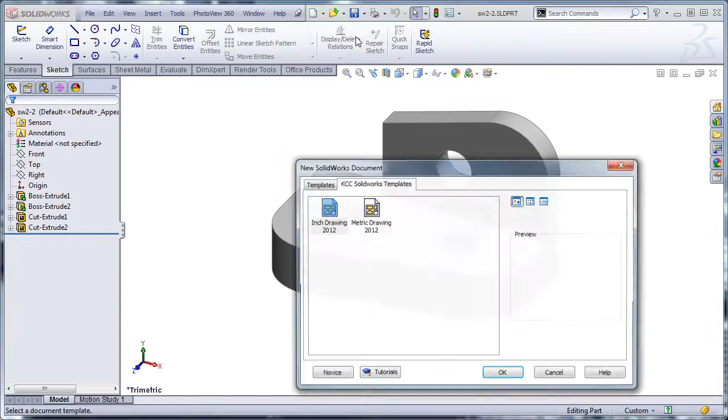So we're going to make a drawing from a part or assembly, and it's going to ask us which template we wish to use. This is an inch part, so we're going to select inch drawing. And I'm going to choose my sheet size, so we have the options of A through E. And we'll click OK. There's nothing else we need to do here.

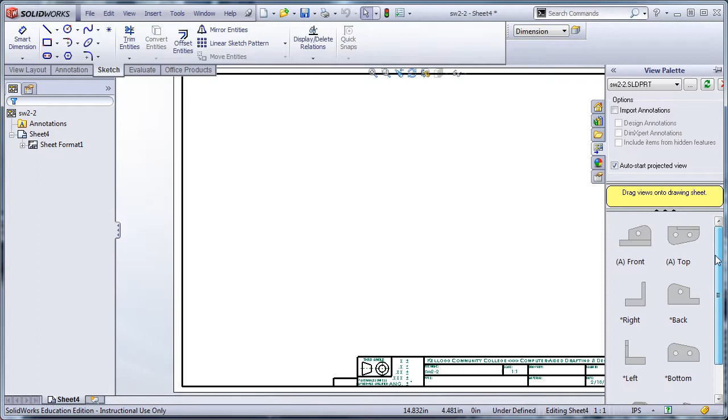It's going to open up a B-size border for me. And then you'll see in the right-hand column, it shows me all my views. What we do here, it's not obvious from looking at this unless you read this box, is you drag the view onto the sheet.

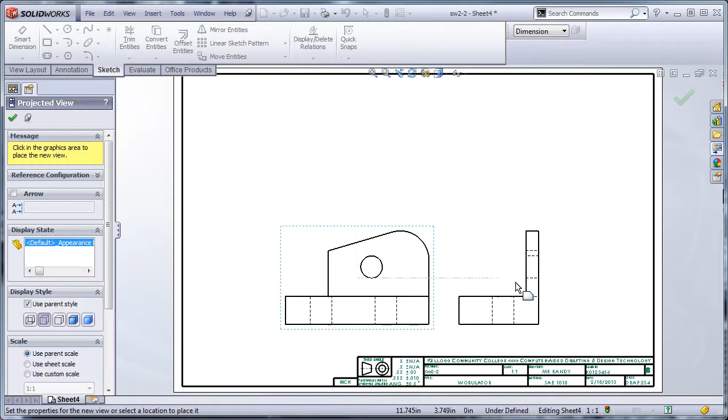Now I'm going to drag the front view onto the sheet, and I'm going to let it go. At that point, notice that the box has disappeared, and notice that as I move away from that view, it just automatically rotates a view for me off the front view.

We don't want to individually insert views because they won't be aligned. So I'm going to pop a top view right here. I'll just click, and then I'll come down, touch the front view, and I'll move to the right, and I'll put in my right side view. We could also do an isometric view here if that's the view we wanted, and that's okay for this part, so we'll just drop that in.

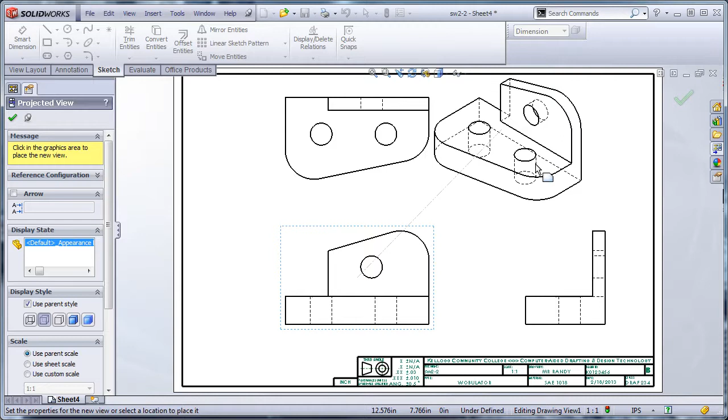Now I can close this dialog box. Now the isometric view, something to note right off the bat, we never show hidden lines in isometric views, so make sure you come over here, and I've just clicked in this viewport. You can see when I mouse into the view, it lights up a little gold box there. Click inside the viewport, and then we're going to turn hidden lines off. You can also do that up here. So you can change the appearance of the view in either place.

Doesn't make any difference. We're going to look at these three views and make some decisions about hidden lines. I don't know that it's necessary to show hidden lines in this view, so I might be inclined to just turn them off. Your assignment does not look that way when you look at the handout, but you could turn off hidden lines in this view if you wish.

Now, this part has a rather odd scale. You'll notice that the drawing scale down here automatically is filled in and says 1:1. But we need to change the drawing scale for this one. This can be a little big when we bring our dimensions in.

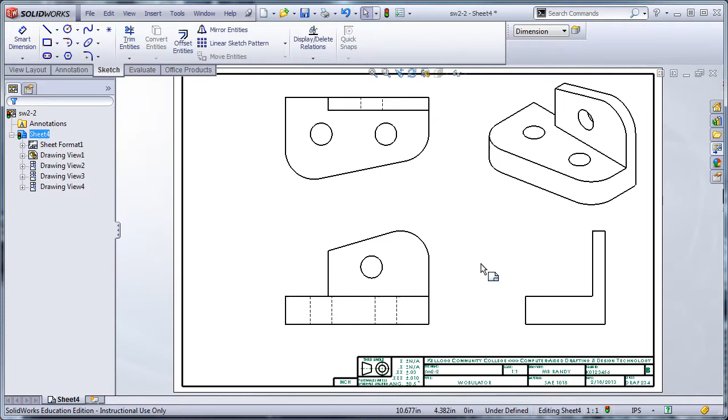So again, this is a viewport, and this is a viewport, and there's a viewport. I'm going to click out in white space, so I want to make sure I'm not lighting up a viewport. I'm going to right click, and we're going to go to Properties. This is where we change our global sheet scale for our part. I'm going to change this to 3/4 size, or 0.75 equals 1. I'll hit OK. And it's going to shrink my views down.

You need to be very careful. When you bring in your first view, let me scroll down. A lot of students, when they want to change scale, go in here and edit it. You are not allowed to do that for me. The title block automatically fills out based upon the sheet scale. So if this box is not checked for the first view that you insert, then the title block will not correspond to the view scale.

So I want you to notice, first of all, that my first view in, remember I brought my front view in first, has a scale of use sheet scale. That means that no matter what my sheet scale, the title block will be correct and the drawing view will be the correct size. If I look at these other viewports, it's going to say use parent scale. This is the parent view because it's the first view I brought in. This is a child, this is also a child, and we would see over here the child also says use parent scale.

So parent view and child views should be linked by 'use parent scale.' That way, if I change the sheet scale, all these views will change their size. The isometric views we put in can be anything, so I'd like to shrink that down a bit. Only the isometric view can use a custom scale.

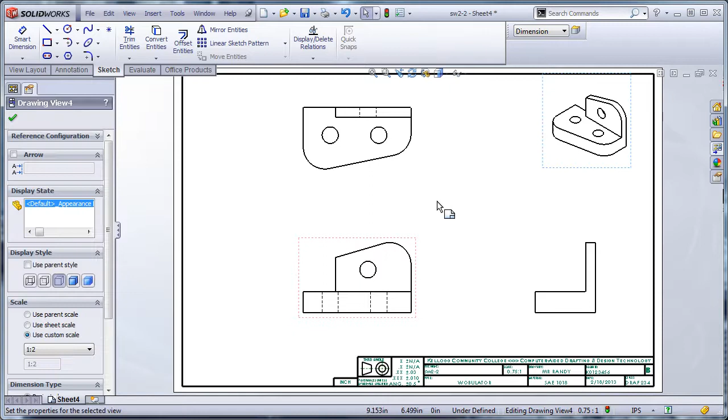Now we have our three views, and we're ready to bring in dimensions, center marks, and things. Let's see how we detail this part. If you remember when we did this assignment, I'll bring this on screen for a second.

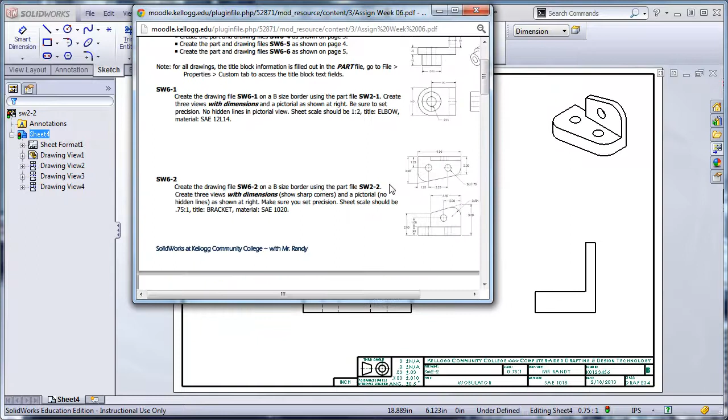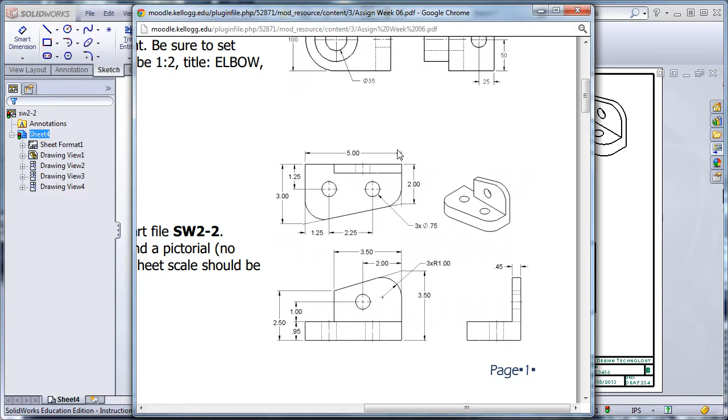We'll have to scroll over. There we go, let's stretch this out. When we did this first assignment, this part was a bit unique in that we filleted these corners in the sketch, but the dimensions went to the sharp corners. You can see that this drawing has sharp corners shown here. I think you can notice when I look at the drawing that we don't see those sharp corners, so I'm going to do this first just so it's easier to see.

I want to put the sharp corners in for these three radiused corners here, and I'll show you how to do that. This is a rather weird thing—it doesn't seem very intuitive, but this is what I'm going to do.

I'm going to click on this line, hold the control key down, and click on this other line, just like we do when we create a relationship. Then, the weird part: I'll go up here and click on the point tool. Watch what happens—it inserts a sharp corner for me. The point is placed at the intersection, but instead of displaying the point, when you're in a 2D drawing, it will put in whatever you've identified in the SolidWorks settings as the theoretical sharp appearance.

So let's do that again. I'll pick this line, pick this line, and click the point tool. Then finally, we'll pick these two lines and click the point tool. All right, so we've got those in.

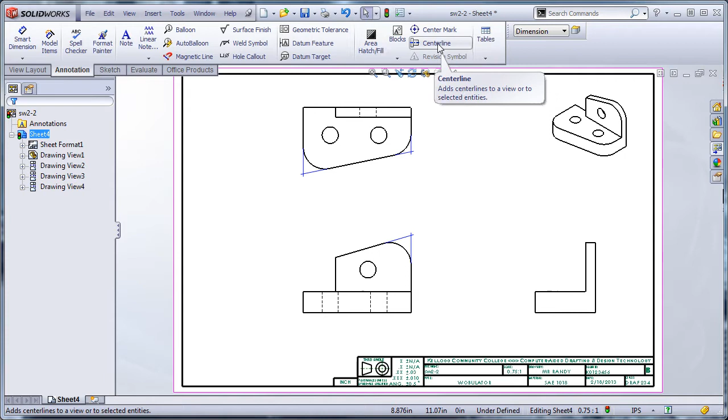Let's go ahead and put our center marks in. Again, it's not necessary that you do this first—it's just easier right now because the drawing is very clean so we can see the center marks. We have a center mark tool and a center line tool up here. These behave a little oddly, in that once you start them, you have to close them before moving on to something else. So let's click on the center mark tool.

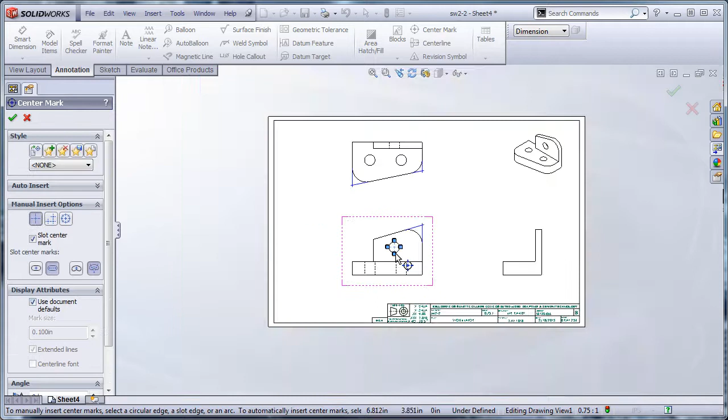Now, this is a hole, all by itself. Here's the center mark dialog box, and we're just going to do a single center mark. It has default settings, and I'll click on that hole—let's zoom up a bit. I'll click outside here and hit escape. Now that's an appropriate looking center mark.

We'd like to see that this extended line bridges the hole—doesn't have to be exactly 50-50, but we have a bridge on either side, and it will show in the print when we print it out. So that's a perfectly good looking center mark there.

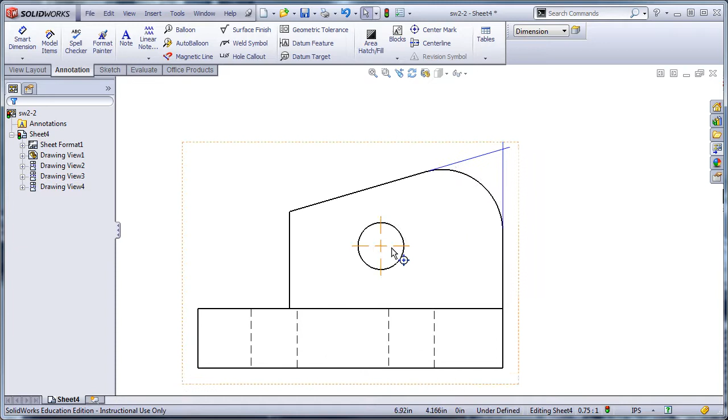Let's zoom out, go up here, and do the center mark tool again. Now, technically this is a hole pattern, because these two holes are dimensioned from a single dimension off this back edge, so we'd like the center marks to be connected. So what we're going to do is click on the pattern or linear center mark button here—I call this pattern because it's for hole patterns.

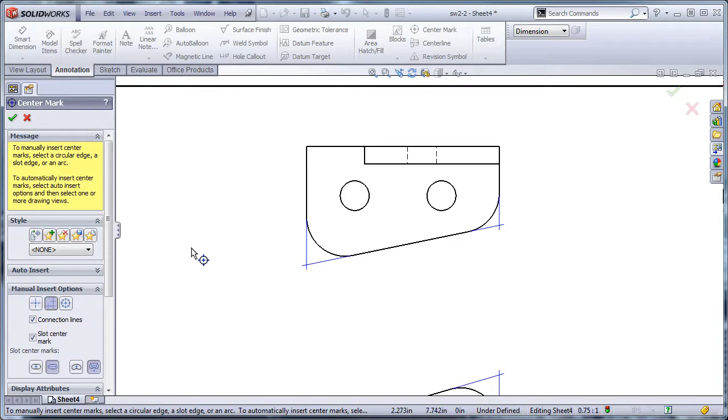Now I'm going to pick the first center mark, then pick the second circle, and it connects them for us, and we'll hit OK. So we get a nice center line connection between the two.

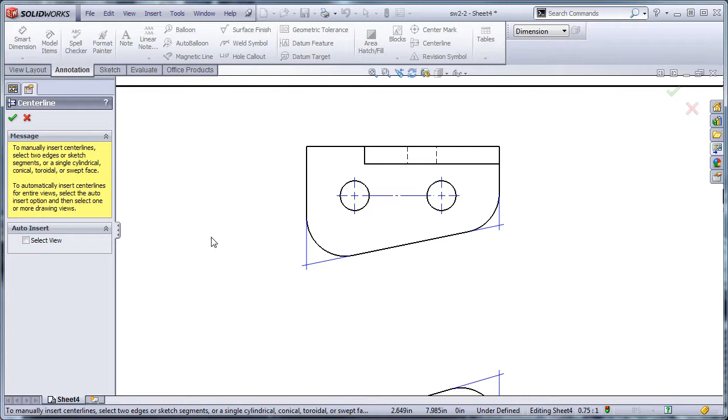Now I have some center lines to put in my views where I see the hidden hole. So let's use the center line tool. There are a couple of options for it. If you don't check this box, which we'll do in a minute, you pick the two sides of the cylinder, the hole, and it puts a center line in.

Now for this view, we'll do it a little differently. Let's say select view, and I'll just click inside the viewport. All I have to do is get inside that golden box and click, and it'll center mark. Now, this is a perfect example.

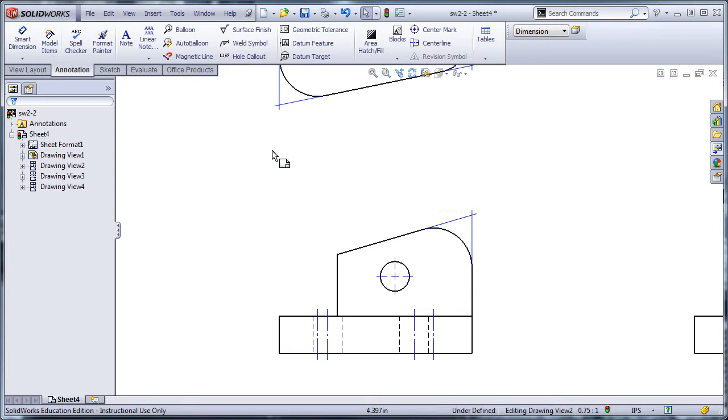I got some extras here. It gave me a center mark for this corner, and it gave me a center mark for this corner. So I'm going to have to do some cleanup. If you're going to use the view option for the center mark tool or center line tool, be careful.

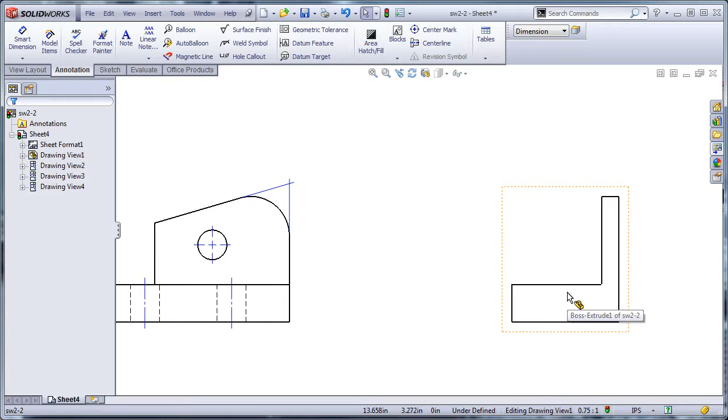You may get some freebies that you don't want to see. So these have to come out for sure. Those are filleted corners. We don't show those center lines in this view. We only would show the two hidden holes. And again, with the hidden lines off in this view, we don't need to show center marks. If you're going to turn hidden lines on, then you've got to put the center marks in this view.

Up to you. All right, so I have now all the detail information here that I need. I'm ready for dimensions. Now, I'd like to show you something here, and this is another situation where I'm showing you what not to do.

I'm going to bring a dimension in. I'm going to go between those endpoints. You'll notice that by default it comes in with parentheses. I'm going to turn those parentheses off. And that looks perfectly fine.

However, let's take a look at this. If I double click this dimension, nothing happens. I can double click that all day long. Nothing happens. It just brings up the dialog box where I can edit that dimension. I can change the precision and do different things. So that dimension is dead. It's not connected to the model at all.

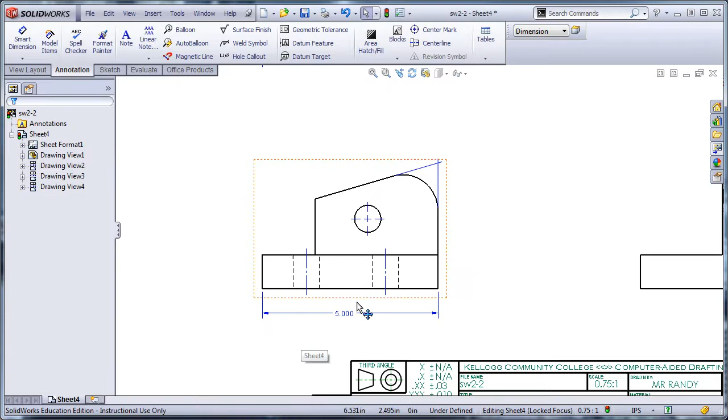So I'm going to delete that dimension. I want to show you how I want you to do your dimensioning in SolidWorks. What we're going to do is come up here and click on Insert Model Items. You can also get it on the Annotation tab, which is where center mark and center line are. Insert Model Items is right here. If you can see my mouse there in the upper left corner, that's the Model Items button.

Now, we try to leave things in their default appearance at KCC so that you know what it's going to look like if you go to work and do this. So when you look at this feature manager over here, it defaults to selected feature out of the box when you install SolidWorks, but we want to bring in all the dimensions for the entire model.

So these two steps I'm going to do right now, you're going to have to do every time you start working in SolidWorks on a given day. Once you've set it, the rest of that class period, it will remember the settings, but when you come in the next day and do this, you'll have to reset this.

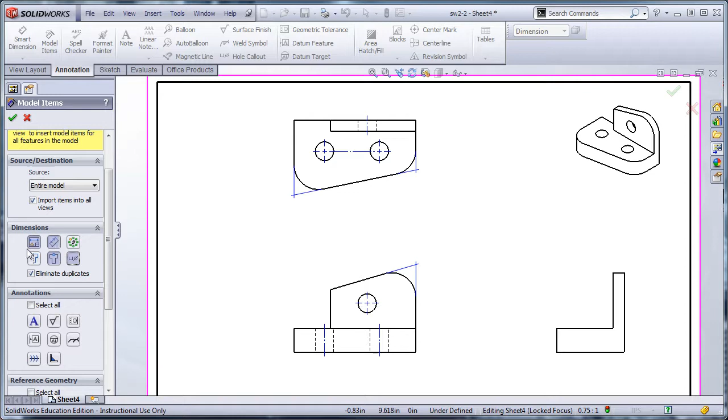So entire model, and then what we want to do is make sure that these four buttons are depressed. You can see they're gray now. We need to bring in dimensions if they're marked for drawing. We need to bring in all the dimensions that are not marked for drawing, which we don't use these two features, so just make sure they're both highlighted.

We need to bring in any hole wizard hole locations, and we need to bring in hole callouts. So all these things need to be brought in. We don't need to bring in counts for patterns. We won't use those in that way. And we don't need to bring in the hole wizard profile, which is the profile view dimensions for the geometry that SolidWorks used to create the hole wizard hole.

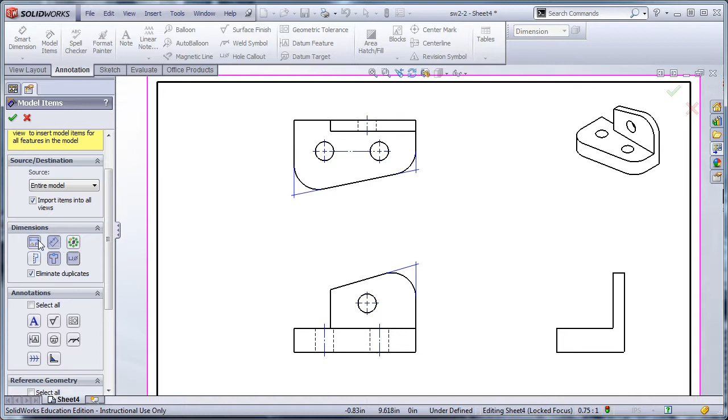So these four buttons have to be clicked on. Make sure they're grayed out, and we want entire model. We're going to click OK. Now SolidWorks just spit in, if you will, all of the dimensions for this part that were in the model if there was a view, a proper view for them to come in.

If I didn't have this top view in place, I would not have gotten most of these dimensions. There are a few of these that might have popped into the right side view, but most of these dimensions wouldn't have come in. So you must have views in the model for each dimension to show properly in, or SolidWorks won't import them. Now you remember a minute ago I had a 5 inch dimension down here at the bottom.

If I double clicked on it, nothing happened. Well, here's that dimension again, up at the top now. I'd like to show you part of the power of SolidWorks. In SolidWorks, the drawing and the model are both linked dynamically. If I make a change in the drawing, it changes the model file, and I'd like to show you that.

So let's double click on this dimension, and let's change the width of this part to 6 inches. Now you'll notice that my views have all got these grids over them. That means something has changed and the drawing hasn't updated yet, so we have to rebuild. I'm going to go to the rebuild button and click on that, and I want you to watch that top view. It just changed and is now 6 inches long.

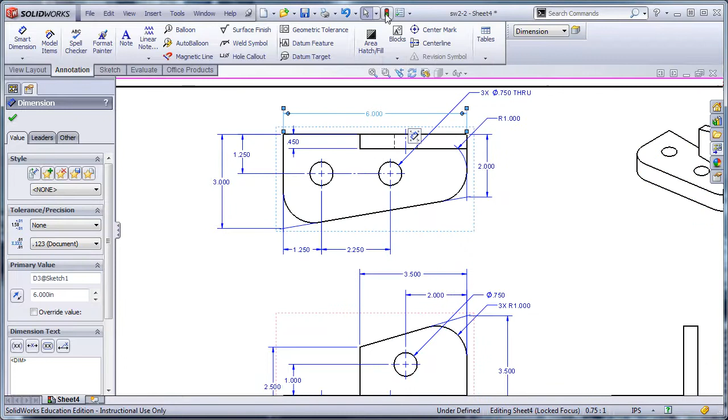Better yet, let's save this part. We'll just call this temp. And let's open up the model. I'm going to right-click in the view, and we can open the part up. It's a fast way to go between the part and the drawing. You can see that the part has changed on the screen here.

So let's go to that boss extrude, and let's edit that sketch, and let's change that back to 5. Let's close the sketch. You can see the model is back to its original shape. We're going to save that and close it, and the drawing has automatically updated.

So if you import all your dimensions, they're live dimensions, and you can change the model. If you found an error, you can change the model by double-clicking on a dimension. That's an important advantage we want to take advantage of in SolidWorks.

So I do not want you to manually put any dimensions in if you can help it. There will always be the occasional situation where you can't get SolidWorks to import the dimension, or put the dimension in the view it should be in, that you're going to have to manually dimension something. But that may happen once in a drawing, and it won't happen in some of these drawings early on.

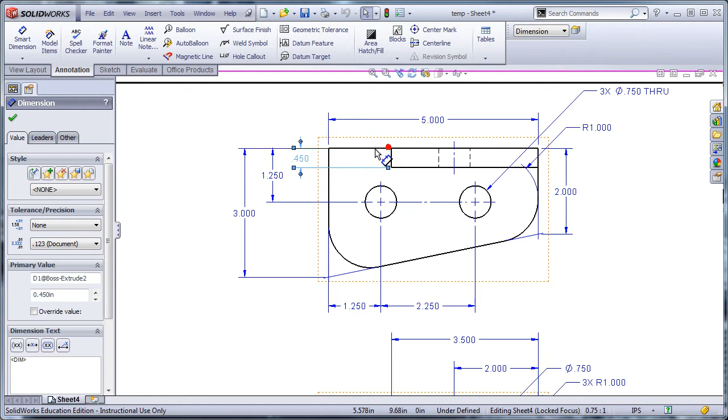All right, so let's beautify this drawing. There's a few things we need to look at in this view. First of all, one of the problems with SolidWorks, you'll notice we got a nice gap in this corner, and we got a gap here, but depending on how you create the features, the extension lines will oftentimes run all the way into the feature and cover up or not show that gap. So I'm going to have to pull that back, and I'm going to eyeball that gap, and you're going to have to develop that eye of approximating the gap based on the ones SolidWorks gave you.

Okay, we want to see consistent gaps, and you're all visual people, or you would not be hanging out in the CAD lab. So I'm going to expect to see appropriate gaps there. If you get too tight and when you print it there's no gap showing or it's minuscule, I'm going to mark that wrong. So you've got to make sure you get the right gap, and again, don't go too big - that's just as bad. All right, so that gap's good now.

This dimension, I don't want to see this look, so we'll talk about that in class, but I'm going to cover up that gap on that center mark. That's not an appropriate center line look. So I'm covering these gaps - I'm just clicking on the dimension and then dragging that point up. My gap for the theoretical sharp is okay, I'm not crazy about how that's going to print, but that's okay. And I can pull this back - I'm going to pull this back quite a ways.

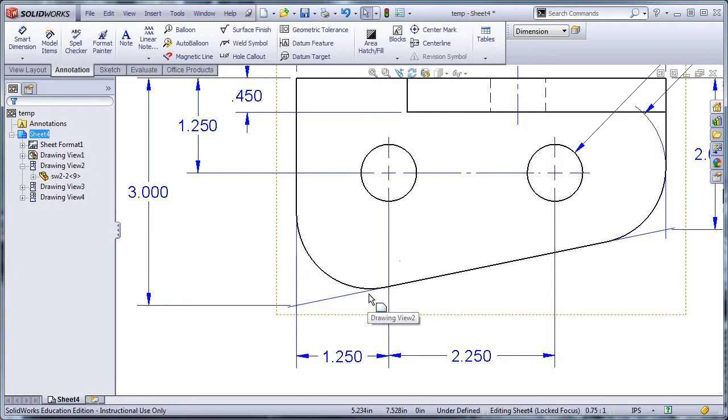However, the theoretical sharp that's in here, I can't do anything with those gaps. I don't like this look at all, I don't like how it prints. I'd like a nice big gap between this line and the arc, but I can't do that with the theoretical sharps that SolidWorks inserts, so we're just going to live with it. All my gaps look okay over here.

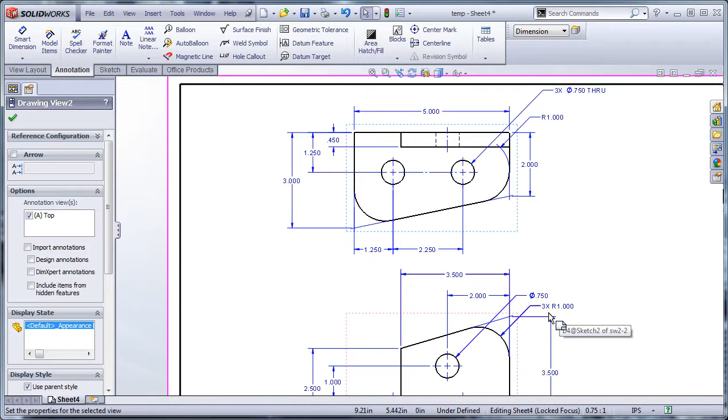Now I have to make a decision on where I'm going to call out the radius and the hole diameters. Let me zoom back just a little bit here. You'll notice that SolidWorks gave me a 3x by R1 dimension over here, which is kind of nice, so I'm going to keep that one. This other one's redundant, so I'm going to right-click on it and hide it.

The advantage of hiding dimensions is that if you decide you need them later, you can bring them back. I'll show you that really quick. You go to View, come all the way down to Hide/Show Annotations, and all your hidden dimensions turn gray. If you click on them, they turn blue again.

You can also turn off dimensions, so if I didn't want that dimension, I can turn it off. Whatever you click on flips it - if it's hidden, it becomes visible, and if it's visible, it becomes hidden. When you're all done, you have to turn that back off - View, and then Hide Show Annotation.

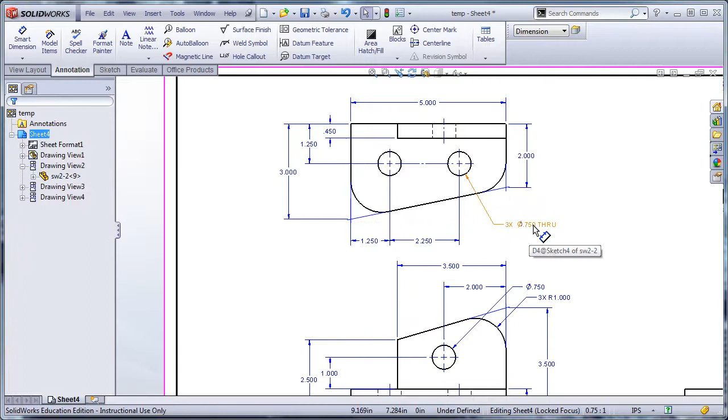All right, so this view is actually looking pretty decent. I'm going to move this whole call out down here. Notice that it sorted out there were 3 of those .750 diameter holes, and it put that right in the note. Let's have a look at our front view here.

We have a gap here. We do not have a gap here. I'm going to click on that 1-inch dimension, and I'm going to bring that over.

While it put the .950 dimension here on this edge of the part, I really don't know what this line is. It's really not showing me the profile, but it's showing me the profile very nicely over here.

So I'm going to take this dimension and drag it across, and I want you to notice something - when I get close to the 1-inch dimension, it's going to snap, and you might see a yellow line. It's hard to see, but there's a yellow line striking across those dimensions, snapping them together. Now, by doing that, I've messed up the extension line, so I got to pull this one back, and then pull this one back.

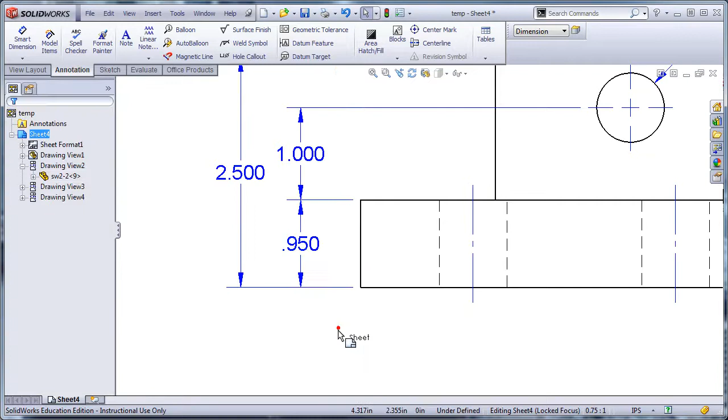And that one's too tight - I think you can see that. I'm going to click on that and pull that back even further to get the right gap there. We said we were going to keep this dimension, however, we don't like this look.

I'm going to hide this one because I've already got the hole call out up here. So I'm going to right click and hide that, get it out of the way.

Now the 3XR1, that's fine, but that's a big radius. We could show the center point and flip that arrow in, which is kind of preferred when we have a big radius like that, so I'm going to flip the arrowhead in. In SolidWorks it's really easy - you just click on this dot right here, and it flips the arrowhead. That works for any dimension, so I can click on this dimension and flip the arrowheads in or out.

And then I need a plus mark here, not the whole big center mark, just a plus mark, so let's look at doing that. I'm going to click on the center mark tool, and I'm just going to go ahead and click this, and we can see that's definitely not what we want. So over here in Feature Manager, I'm going to turn off this checkbox that says Use Document Defaults, and I'm going to say don't extend the lines by turning that off. And that's the look we want.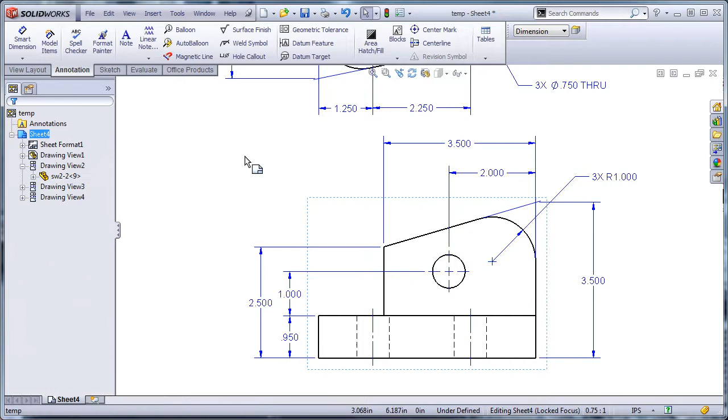I need to cover these gaps on the circle here - cover these gaps. This is one of the most common mistakes that I deduct points for in drawings: the gaps on the extension lines or the extra gaps we get around a center mark.

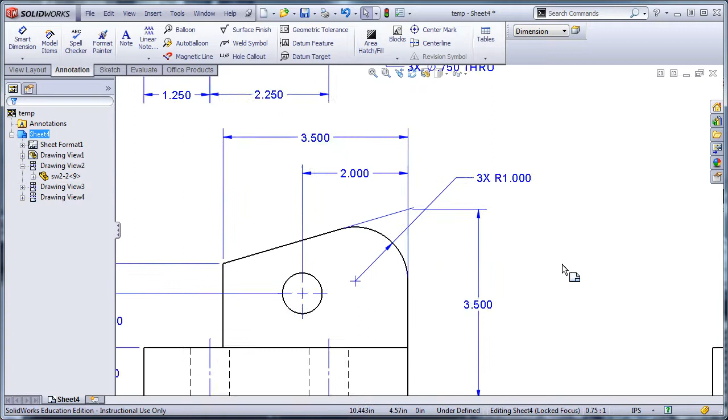All right, let's zoom out a little bit. Now we have this lonely looking right side view over here, and the reason for that is there's a dimension in the top view that really belongs in the right side view. Again, this is not the profile shape of this section here, so this dimension's in the wrong place.

So I'd like to show you how to move a dimension. To move a dimension, you hold the Shift key down on the keyboard, then you click on that dimension and you drop it.

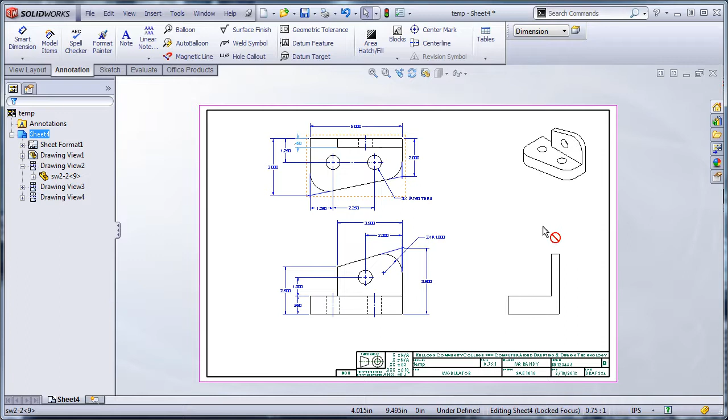Notice the dimension would like to be up here somewhere, but I still have the no symbol there, the circle with the slash. It's not until I get on top of the view that it will let me drop it there. That's a shift and drag. Control drag copies the dimension, which is usually not what we want, but if you ever have to do that, that's how you do it.

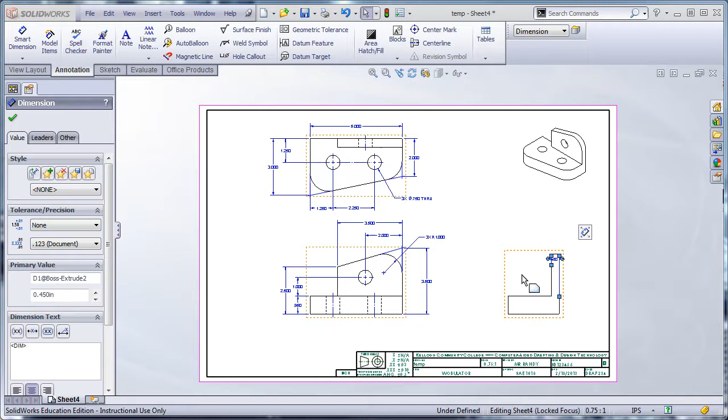Now I'm going to zoom up on that 450 dimension, and we'll place it, and you'll notice that my dimension kind of snapped in, and we'll come back to that in just a minute. I'm going to pull this up and get a gap here, and drag that one up and try to get about the same gap.

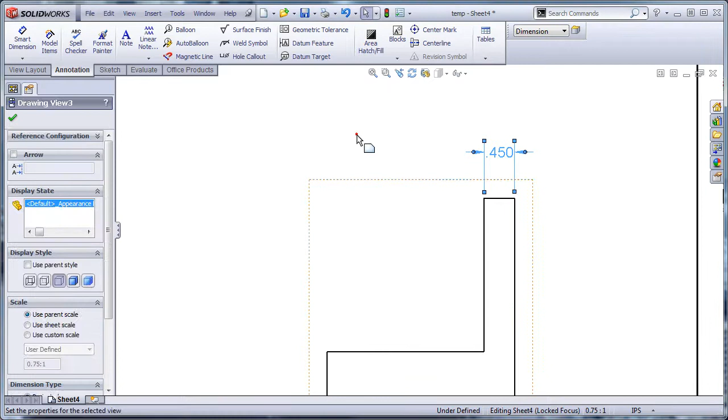That looks better. So to check dimension spacing, because I know I have some spacing problems over here, if you wish, you can turn on a grid. Click on the eyeglasses here, and here's the grid button, and I'll turn the grid on. The grids are already set up, both for the inch and metric template, to give you the appropriate spacing for dimensioning and view placement. In an inch drawing, these are 1/2 inch. In a metric drawing, they're 12 millimeters, and it will give you appropriate spacing.

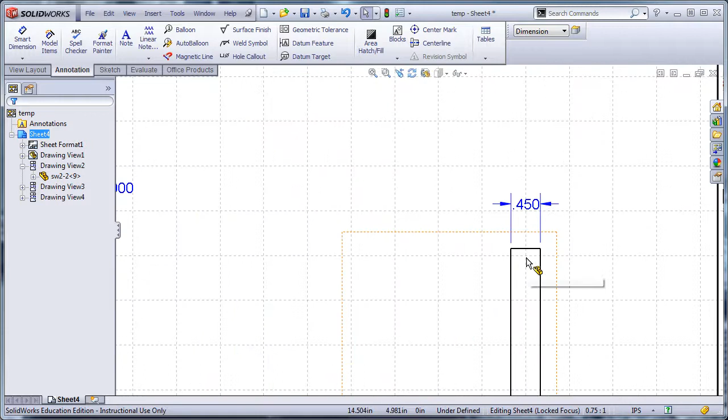So let's zoom up on that dimension, I just want to make sure. Here's a grid line, and there's the object line. So look at that distance, and then here's a grid line, and here's the dimension line, and that's the same exact distance. You probably can't tell because you're not moving the mouse, but as I move up, it snaps to that spacing.

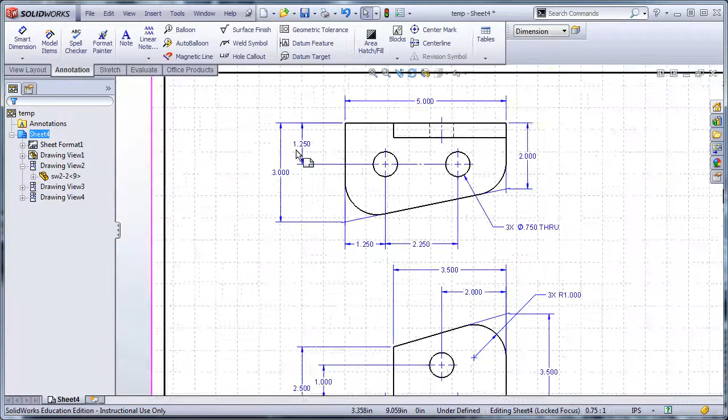All right, let's zoom back over here. So this edge is right on the grid almost, and when I drag this over, it's going to snap right there. I'll drag this one over and get it to snap. These are out a little far, and they actually snap right there. So I'm going to pull those in because those were a little far out. This one is about the appropriate distance. All the rest of these look good.

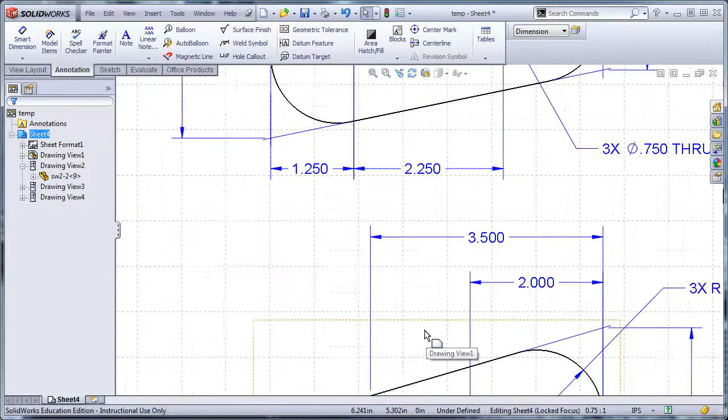This one is also a little out. It snaps right there. I'm going to bring this one down. It should snap in right about there. Make sure you stagger dimension values and those kinds of things.

If your dimension keeps locking to different things, I don't know if you can tell, but my dimension is snapping to various dimensions. If you hold the Alt key down, your dimension will wander for you while you're moving your mouse. That's the Alt key to get it to move freely.

All right, I got to get these parentheses out of the way. I'm not sure why they're there, I must have accidentally turned them on. I'll show you that again. Click on a dimension, that little button pops up, and then when you mouse over it, you can turn the parentheses off right there.

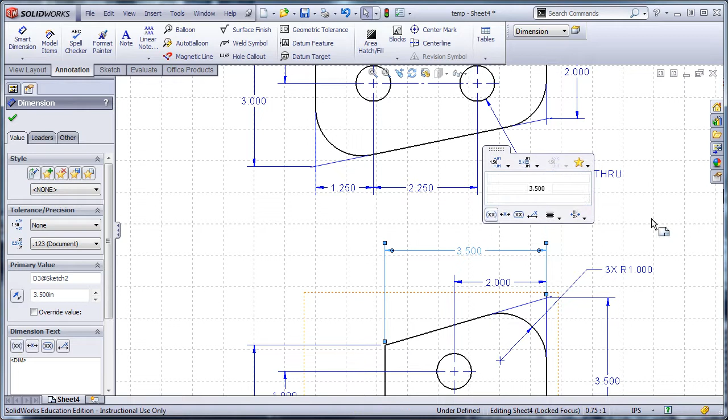All right, how are these views looking now? They look pretty good. This one is floating pretty far out again. I'm going to move that in until it snaps.

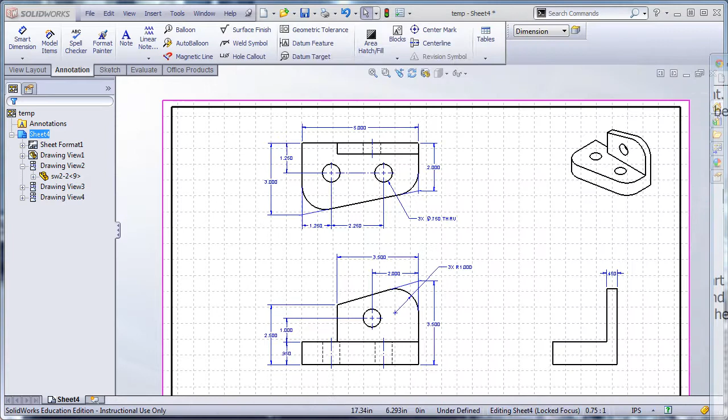Now I want to bring the original drawing in for just a sec. Notice that all of the dimensions on this drawing are 2-place decimals. Okay, all the dimensions are 2-place decimals. So you'll see on this drawing, of course, that everything is 3 places. We need to fix that.

The fastest way to fix that, if you're in the latest version of SolidWorks, is to come right down here at the bottom right corner of your drawing editor where it says IPS. That means I'm in inch, pound, second for my units right now. And don't think you can just change it directly. It doesn't work well. If you'd use the wrong template, this will make a mess of things.

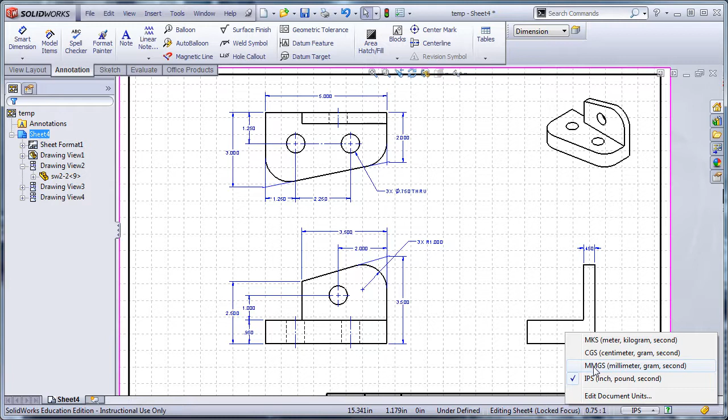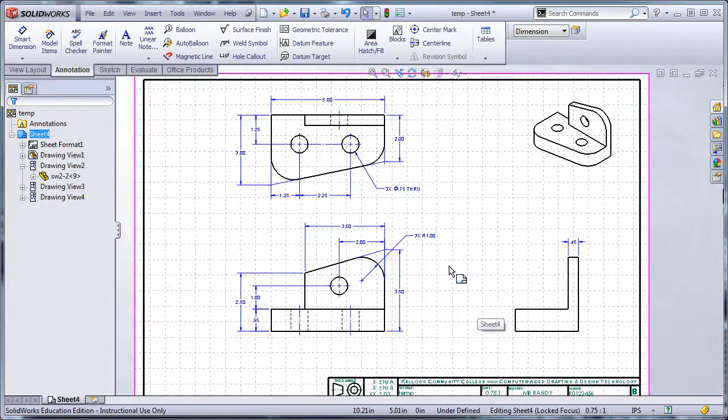But I want to edit the document units, and I want to change my length dimensions to 2 decimal places. Now this is a little misleading because this will also change hole callouts and everything else, but nonetheless, that's the term. Let's hit OK. Now I have all 2-place decimals, and I want to just look over my drawing now and make sure that all my dimensions are in a good location.

Now that the decimals have changed, there's lots of room here for the 0.45. I do want to show you something here. I'm going to bring this drawing in and put it side by side over here.

In my drawing, you will notice in the handout that my 0.45 dimension is outside. I need you to be real careful that you follow dimension rules and not necessarily look at where the text is placed in my example pictures. And this is why.

This view is very small compared to the full-scale views that we have in this drawing, or the 3/4 scale. So when I put this in a handout and it's this little tiny view, I have to make the text height and the arrowhead size much bigger than normal for you to see them. So that often changes my text placement.

You'll notice up here the 1¼ inch dimension, the arrows had to be flipped out. It was too tight to have them flipped inside. Likewise, the 0.45 had to come out. That's just because of what was needed for this handout, because the text size and arrowhead size were so large.

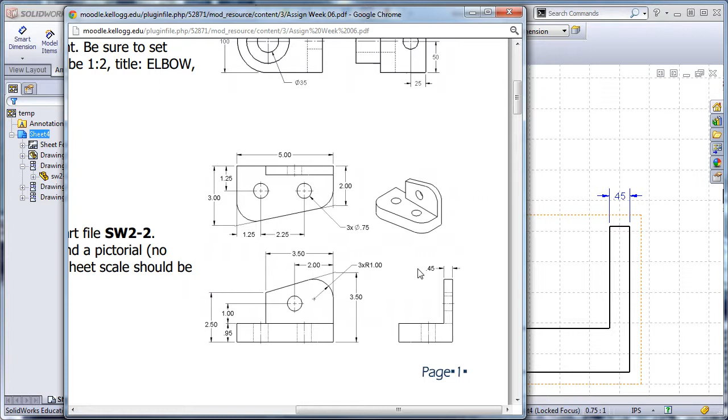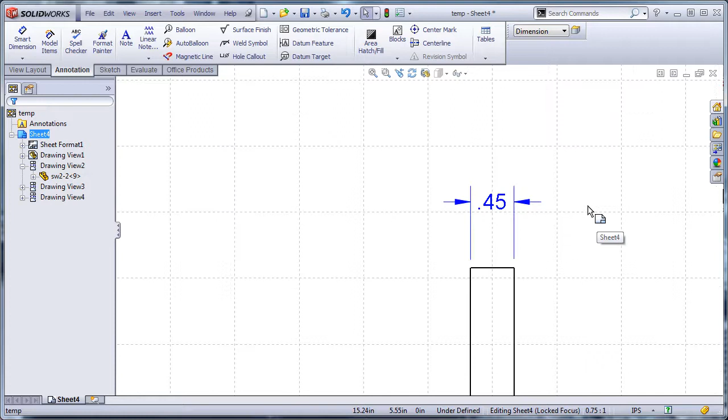You follow the dimension rules in your drawing, and the dimension rule is if there is room for the text between the extension lines, that's where it goes. And there's plenty of real estate here. So I want you to be careful of that. Your placements will not always be identical to mine. In some assignments, I won't even show you placements, so you'll have to figure it all out on your own.

Finally, I want to talk about the text that's in the title block here. You do not edit this title block. If you know how to do that, don't. I'm not even going to show you. We'll show you that down the road.

The information that goes in the title block comes from one of 2 places. The scale and the file name are pulled right from the data for this project. All of the other boxes in here, except the date, come from the part file. So I'd like to show you where that is.

I'm going to open the part file here and go up here to File. If I could get that button to work. File, Properties, and that takes me to the Custom tab here. If it doesn't come to Custom, click on the Custom tab. This is all the information that actually goes in the title block.

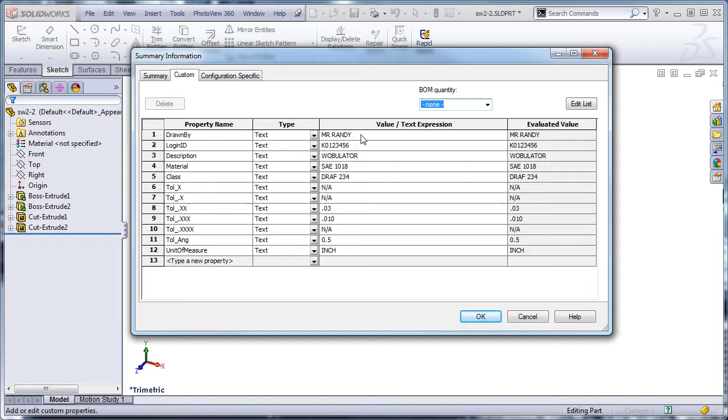You edit these fields to fill out the title block. Remember to use all capital letters. There's another way to get to that dialog box. If you're into shortcut keys, it's Alt-P. Hold the Alt key down and type a P, and that pops that box up. Then save the part. Once you've changed stuff, save it and close it, and it should update your title block.

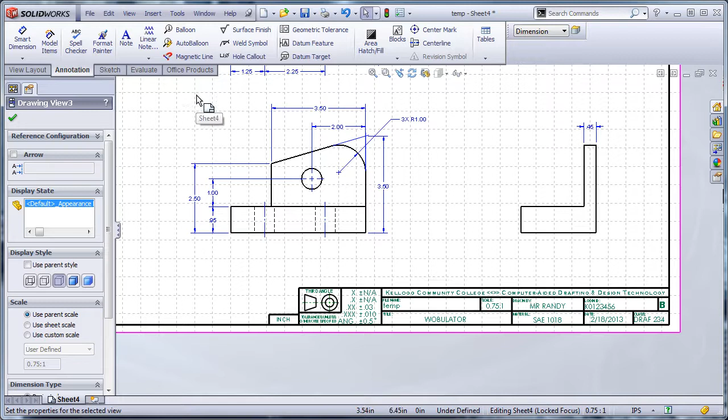All right, I think I'm about ready to print here, so I've got one more thing I have to do finally, and then we're done. I'm going to zoom full size or fit to screen. And then I need to check my view spacing, because our rules say we'd like 1 inch between views of white space, or 25 millimeters.

Well, I don't have an inch in here, I'm pretty close, and I'd like you to see this. I'm going to grab the principal view, and you'll notice when I move it, it moves the views that are aligned with it, which is very nice. I'm going to pull this down so that I have roughly an inch of white space here.

And then a common thing to forget is to take care of this right side view. I need to slide that over so I have about an inch of white space from the edge of this dimension over to this edge here. We want to see equal spacing in our views. It makes the drawing much easier to read and makes it a much nicer looking drawing.

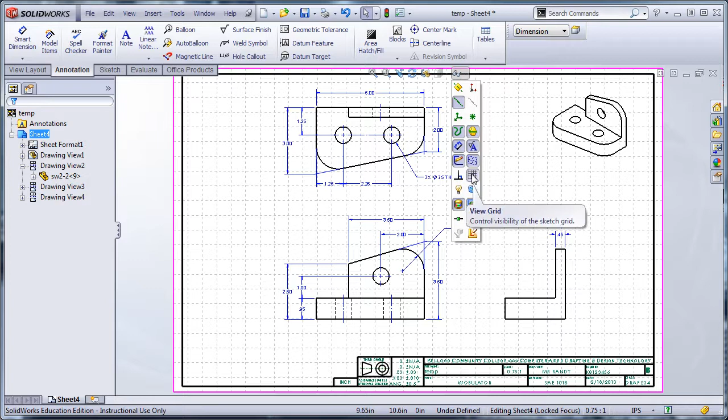And I think we're all set. Try and remember to turn the grid off before you print because the grid prints. I'm not crazy about that, but it's the way it is. If you accidentally print with the grid on, just hand it in that way. I won't deduct any points for it because I hate wasting paper. But try and remember to turn the grid off, and then you are ready to print this drawing.